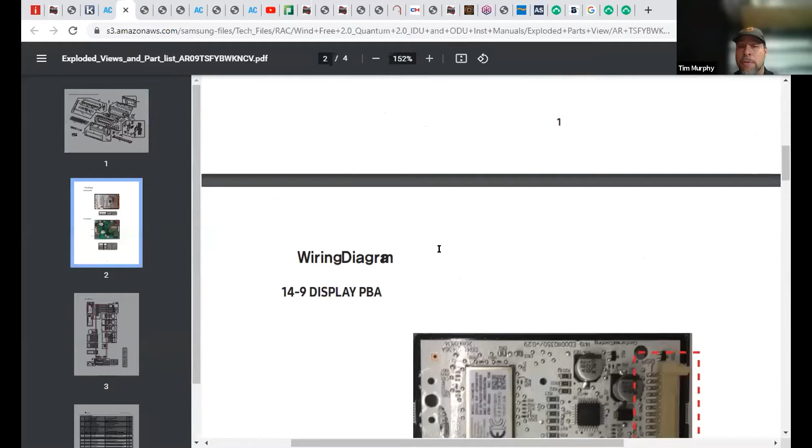But for right now, oh wait, I just want to show you this too. If you scroll down, you have exploded parts views. What's good about this, you can go ahead and get the part numbers before you call the distributor to help speed up the process, and it has a good breakdown of everything. So close that. And now we're going to go to the installation manual.

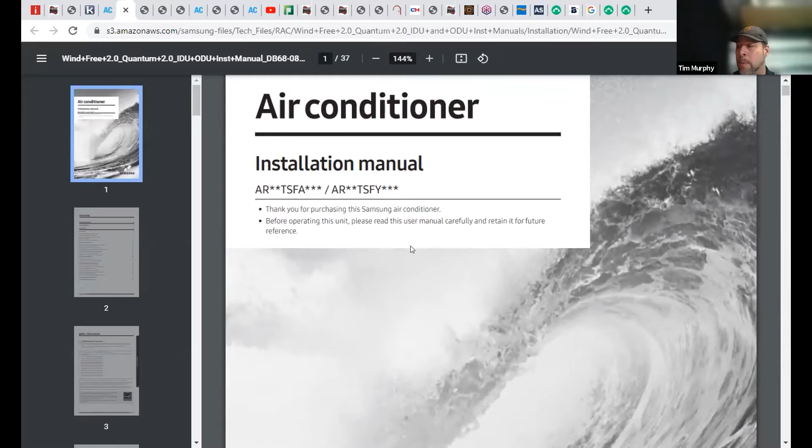90% of the questions that I get asked over the phone could be answered through this website. All this is available also on the app. It's just slightly different trying to navigate, obviously, because it's an app. I do use this website on my phone because it does tend to make it a little easier for me. And then we're going to go to content.

So today what we're focusing on, as I mentioned, we're talking about leaks, specifically in mini splits. And some of the most common issues that I've come across, not just on the technical support side now that I've been working with Tropic Supply, but also myself, having crews in the field and diagnosing and doing installs. There's nothing worse than having to go back to a job site because of a Freon leak that could have easily been avoided if proper steps were taken.

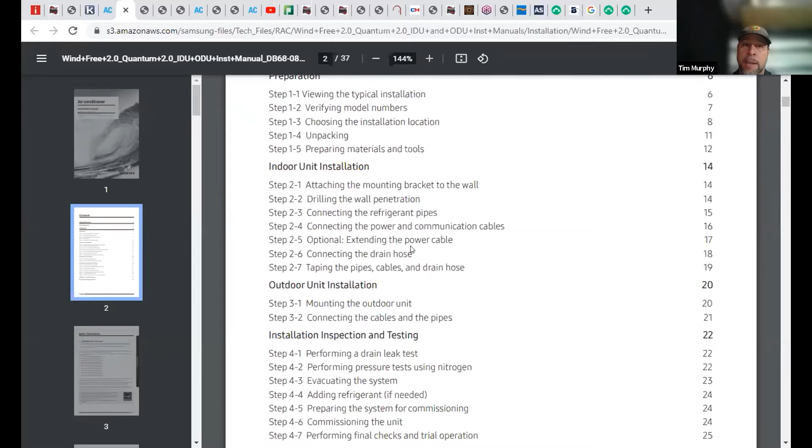So today we are going to be looking at, let's see here, connecting refrigerant pipes. I'm going to move this. Okay, connecting refrigerant pipes is page 15.

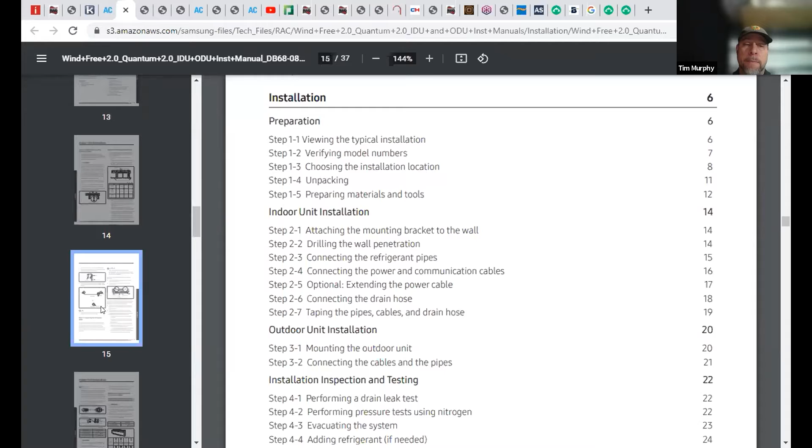Okay, so most of the basic stuff that everybody should know, right? Not crossing over the pipes. And what I want to show you is here are your torque specs. It's going to give you a good range. Your 1/4 inch, 10 to 13 foot-pounds of torque, 3/8, 25 to 30, 1/2 inch, and 5/8, all there for you. So if you're not sure, if you are using torque wrenches, this is a very important resource for you.

Honestly, I didn't use torque wrenches for the majority of my time installing mini splits. So I'm not saying not to use them, but most people don't have them. After using them, I can say that is very important, especially if you got some technicians that don't have much experience making a good flare connection. This torque wrench is going to give you a peace of mind.

You set it, it clicks, and you forget about it. It's going to be sealed. As long as they did a proper flare, you don't have to worry about being over tightened or under tightened. It's very useful. Actually, Todd Sutherland was the first person to really stress to me how important it is. And once I started using it, I didn't stop. So I highly recommend investing in a torque wrench.

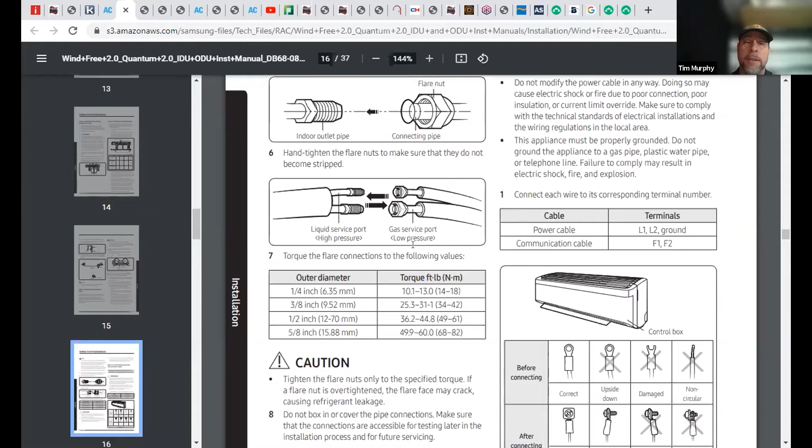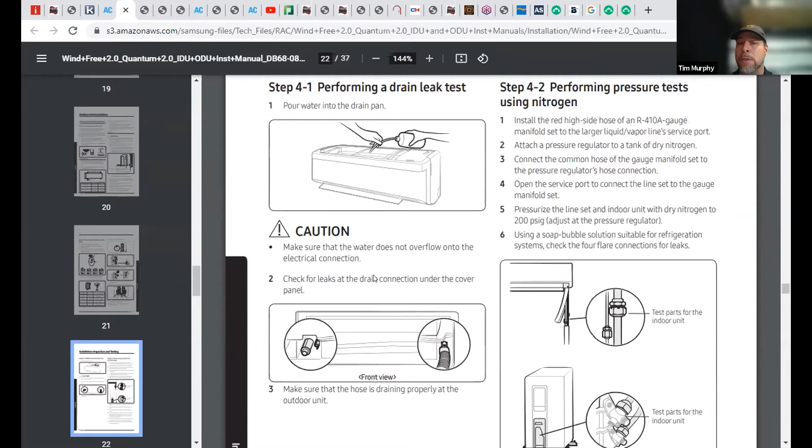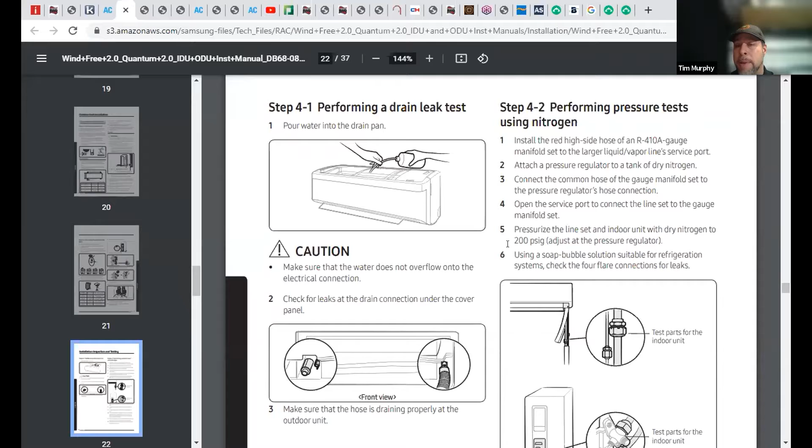Okay, next page we're going to go to is going to be page 22. And this is where we're going to talk about our leak testing. Now, if you joined us for the vacuum Todd Talk earlier this week, you'll already know that your vacuum comes after your high pressure leak test. So Samsung recommends almost like a triple pressure test. They recommend you testing at 200 PSI, check it for soap bubbles, waiting 10 minutes, then going 400 and going to 600.

And in all reality, I was a contractor and I did several installs myself, and we're in a hurry a lot of times trying to get the job done. It's getting late. I recommend at minimum testing 600 PSI. If you don't have the time to do the 200, 400, and 600, just slowly ramp it up to 600 PSI. Hopefully your guys aren't alone on the job. They can have one guy looking for leaks or listening for leaks and then spraying down the joints with bubbles.

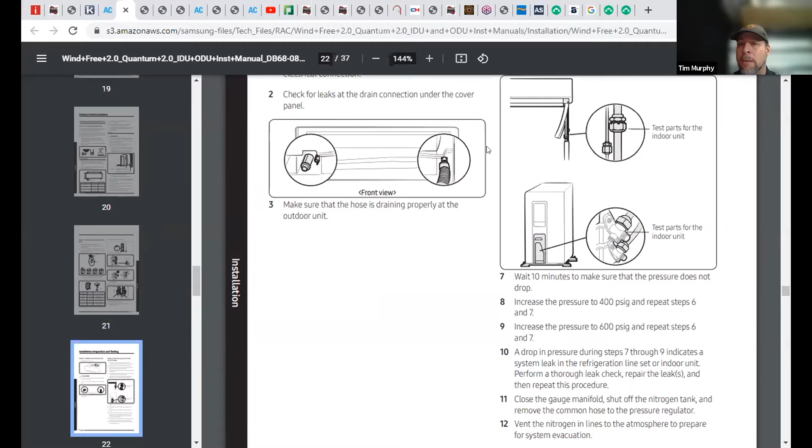I recommend soaking the flare joints with bubbles before you start the pressure test. So that way, as it's starting to fill the system, you may not hear it, but the bubbles are a great visual indicator of a leak. And we're going to see that a little later today. So as I mentioned, your final pressure test should be at 600 PSI, and take your time and listen and use the bubbles to see if there's a leak. If there's no leak, you're good. Just go ahead and put that vacuum on and follow the best practice procedures as Todd Sutherland showed us earlier this week.

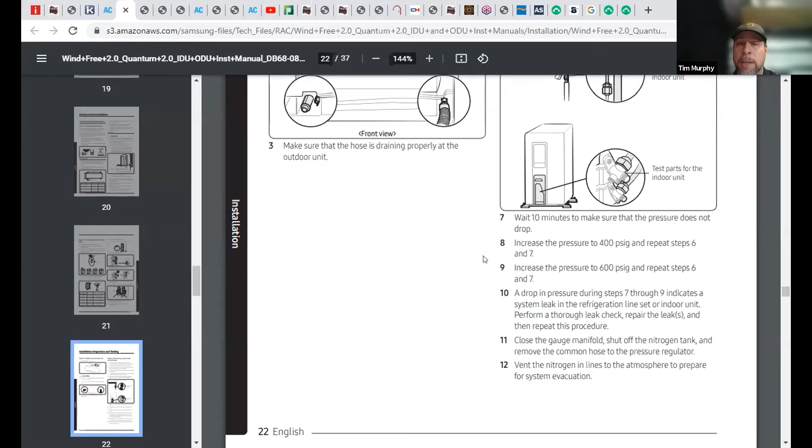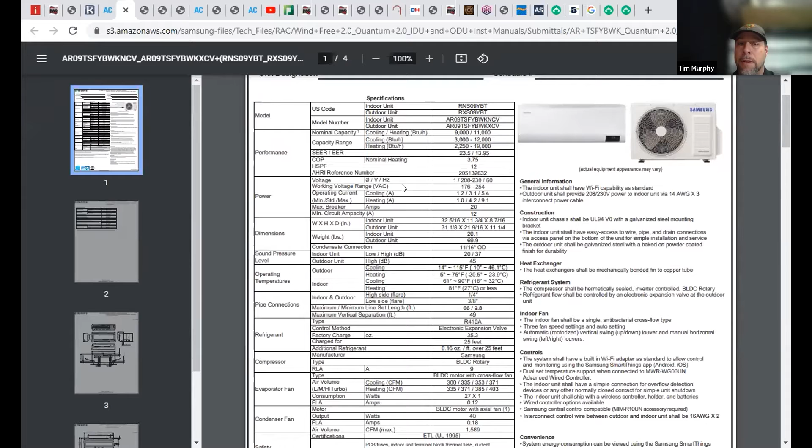So next, I want to go to a very valuable source of information: your submittals. Now you'll see it has a submittal for just about every combination that they're going to offer, but we're going to go ahead and use this one, the 09. So this is your submittal. It's going to show you your matchup. It's going to give you its BTU heating and cooling range. It's going to show you power source, your dimensions, operating temperatures, pipe connections. It's going to show your maximum vertical separation. All this stuff is very useful, especially prior to installation.

We're going to look under refrigerant here. Now, obviously, it shows you the type. And now it shows you your factory charge, which on the 09 is 35.3 ounces. And it's charged for 25 feet. Additional refrigerant, this is very important to pay attention to, because I've been finding a lot of installers grossly overcharging their systems because they're not focusing on that decimal point. They are just seeing 16 ounces, 1 ounce per foot. They're just really not paying attention.

And I've seen guys adding an additional ounce per foot of piping. Obviously, that's grossly overcharged, and you're going to have compressor startup issues. It's not going to work properly. If it does even start, it's just not going to work right. And with these systems, what's critical to understand is that you're not charging to your gauge pressure. Ideally, you want to charge by weighing in the system. I call it a critical charge. If you've worked in refrigeration, then you already understand the concept. But the proper charge in these systems is crucial to a proper working system.

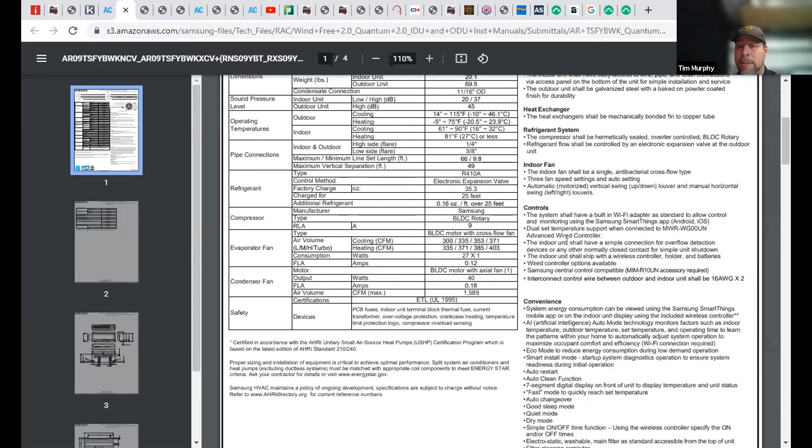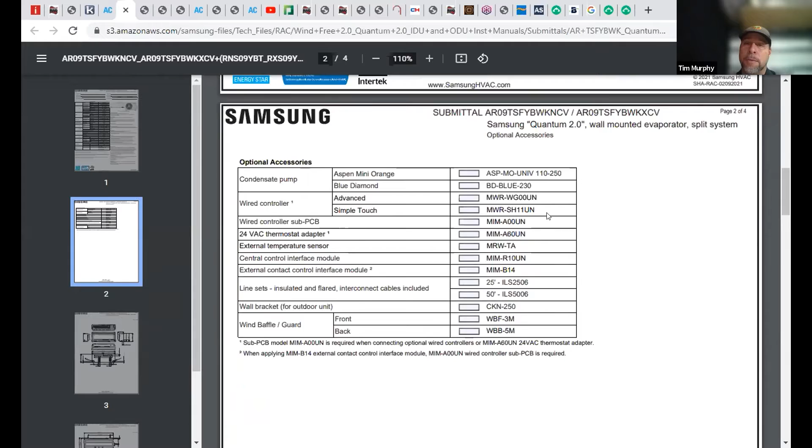Very important to pay attention to that. Another great thing about these submittals is it shows you all your accessories. It gives you the part numbers. So if you're looking for a wired controller, you have your options. Your thermostat adapter, you have all your options here, and it's going to make it easier for you to be able to order these parts and have all those numbers available when you call the local branch.

All right, so with that being said, I'm going to go ahead and switch cameras, and we're going to do some hands-on because you don't want to see me navigating this website all day.

Oh, that's a close-up view of my face. You don't want to see that. There we go. Okay. Can everybody hear me? Nicole, can you hear me? Yes, but you need to stop sharing your other screen. Oh, man. Okay. Is that better? Perfect. Okay. All righty.

One thing, I'm not a fan of PowerPoints. I'm more a fan of the hands-on. So hopefully you guys are as well. Okay, so let's get started here. What I want to start with is what not to use. It's very important that we're not adding anything into the system. These are items we don't use.

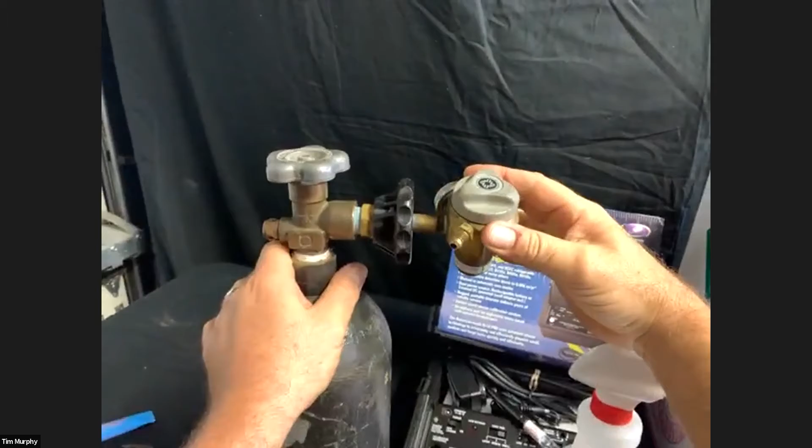You don't have to try to set it. It has a low flow nitrogen setting, and if you don't have this regulator, you can do it with a regular regulator. But if you've never low flowed nitrogen before, there's plenty of videos on YouTube. You need to start low flowing nitrogen every time you braze, especially with all the new equipment that's coming out lately. The tolerances are smaller. You have your micro channel coils. Everything is not as forgiving as it used to be.

So get used to low flowing nitrogen, or teach your guys, or even check up on them if they're doing the install and they're starting to braze. Go out to the job site and check on them. Make sure they're low flowing nitrogen. And like I said, you can hear that it's barely anything. First, you want to purge the system of any air, and then begin your low flow.

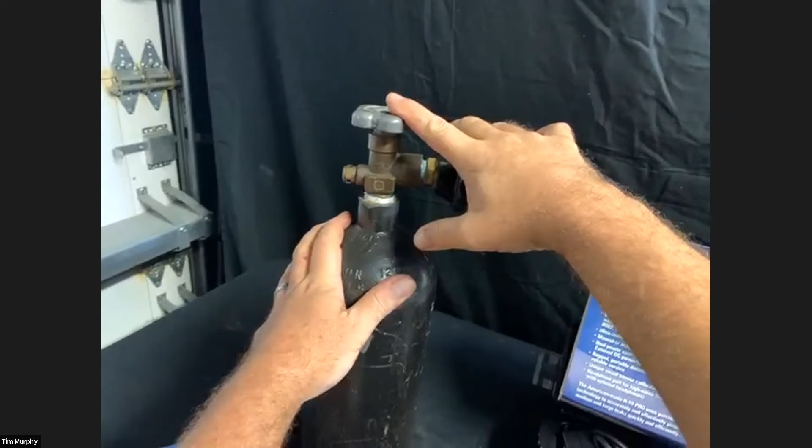But just something I want to mention that is vital: if you do have to solder or braze a joint with mini splits, you have to do this. You really do. Can you get away with not doing it? I'm sure you may get lucky, but just low flow nitrogen. Just make your life simple and headache free.

This is what we're going to be using when I do all my leak tests. I always use Big Blu first. Anytime you go to a job and you have a leak, you don't need to bust out your leak detector first. Take your time, go through the system, look for oil. If there's no Freon in the system, add some extra pressure to try to listen or look for a leak first. A visual inspection is oftentimes all that's really needed, especially on your bigger leaks.

With mini splits, you're going to be looking at your flare connections. And I always suggest that with the mini split, prior to startup, you take the cover off the evaporator as well, to listen to the coil and try to see if there's a leak, or inspect the coil to see if there's a leak in the coil as well.

But this Big Blu works great. What I've noticed that I like about this over a lot of the other ones is that you get these little micro bubbles. They're little tiny suds that will build up. And with the other leak detectors, they're the liquid leak bubbles. I don't notice as good a result finding those really small leaks as I do with this Big Blu. So this is a very useful thing to have in your truck.

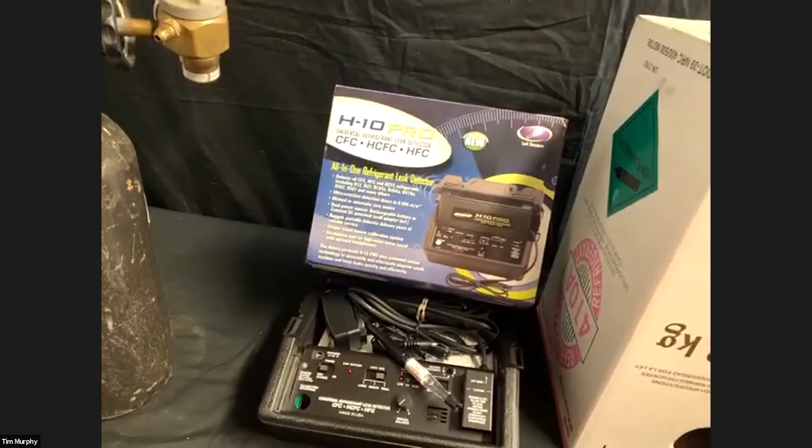Maintaining your tools is going to be one of the most vital things that you can teach your guys or do yourself. And understanding how leak detectors work. If you're using a heated diode, or an infrared, whatever leak detector, it's important to read the manual. And what's interesting is if you look at this right here, it says always read user manual, and has an exclamation point. And of course you want to register it as well. But with these, a lot of times, these are things that a lot of us get kind of complacent about, or we just take for granted that people know these things.

And I'm just finding that sometimes I'm having to state some of the things that I think are obvious, but they're not always obvious, because either they learned in a rush, they were installing, or they never went to school and were trained. I never went to a technical school. I was trained in the field, so I learned by my mistakes, and I made a lot of them.

But one of the important things about a leak detector is maintaining it. You have a little filter here, and I recommend changing that filter, checking it regularly. You don't have to change it every time, but it's important that you make sure it's clean. That way you can maintain and you can find those leaks, especially those small leaks.

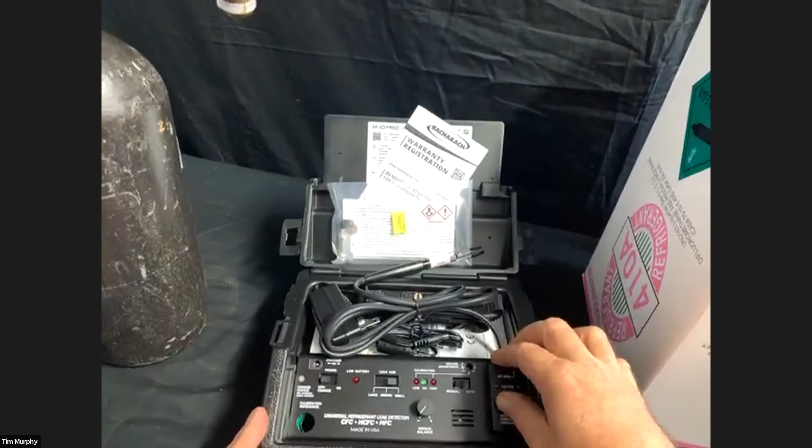What's great about this unit here is that it has a vial where you can calibrate the system in the field. So if you're not sure if it's working properly, it always has something that you can calibrate right there in the field. And this one, unlike the old one that I used to have a long time ago, has a battery and it's rechargeable, so you don't necessarily need to be plugged in. So very, very good tool.

Now I'm going to work my way... Actually, you know what? Before I work my way into some of the things that I recommend using to help you guys prevent leaks, last time I did my mini split talk, I wanted to show you guys exactly what the EEV valve looks like on the inside. So this is an EEV, electronic expansion valve, and basically how it works is it opens and closes by unscrewing. It opens the valve, and this is what it looks like, just like a little needle valve. It just slides in here.

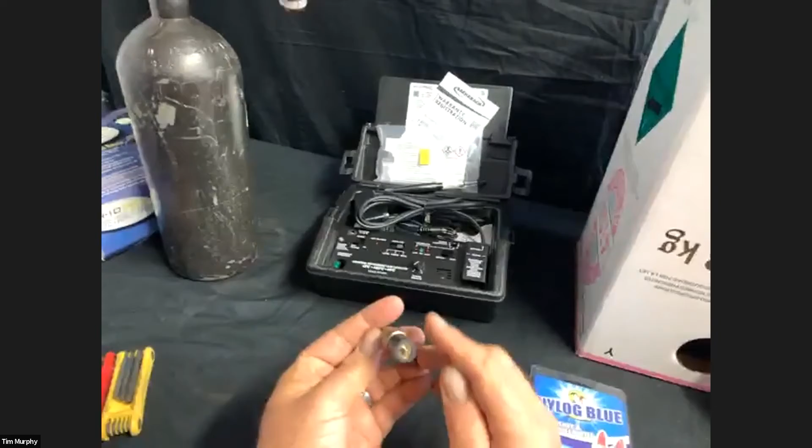So that being said, if you're looking down at this, clockwise will tighten, counterclockwise will open. If you get a little magnet, I usually recommend going to an auto parts store. If you take the top off the system, there's usually a bulb over this, as you see, I cut it off. If you're not sure the EEV is stuck, and this applies to almost every EEV that I know of, you can take that magnet and work your way around that bulb, and it should open the valve if you're going counterclockwise, and close it if you're going clockwise.

So it's just a helpful tool to help diagnose if you're having a system that just seems to be pumping down, or some type of restriction here. You can obviously check the stator, but you may want to see if it's locked up. And the best way to see if it's locked up in the field is just take a magnet, go around. You should be able to open it. But if you're using these kinds of sealants or any kind of additive, that can definitely gum up and clog these EEVs. So that would be something you may want to just try to avoid altogether.

Now, Nylog blue. I know some people say not to use it, just use a little POE oil or something on the flares. I've had good results. I've never had a problem using Nylog blue. I usually, and I'll show you a little later, put it on the flare on the inside. I'll put it on the surface of my flaring tool as well to help lubricate and make sure we get a good flare. And then we have our flare seals. When in doubt, these work great.

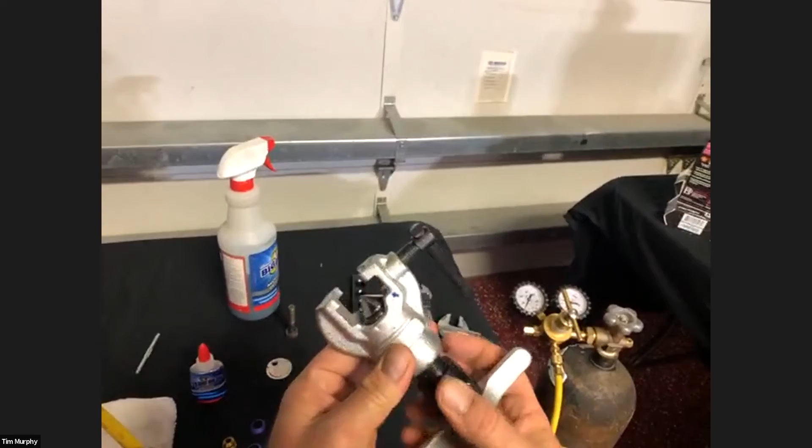Now, I'm going to work my way over here. I'm going to show you the flare tool that I like to use. There are other flare tools out there. If you're not familiar with these, this is one by JB, but there are several versions of this. Yellow Jacket offers this version as well. It comes with a flaring block right here. I recommend getting one of these. And actually, I learned this from Rami Musa from Samsung. He did a video the other day.

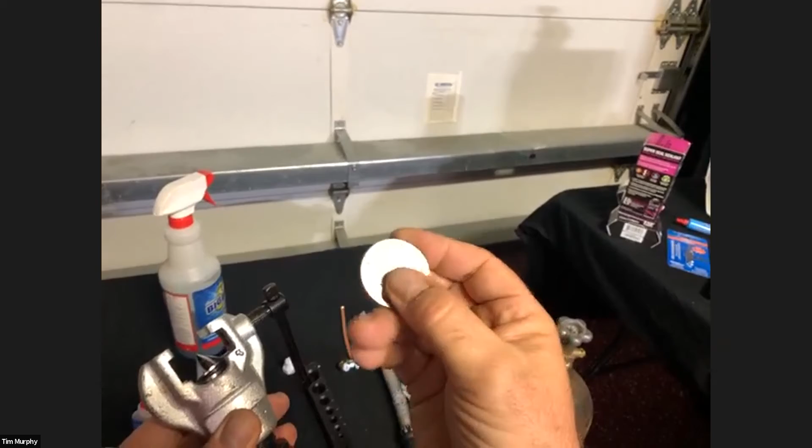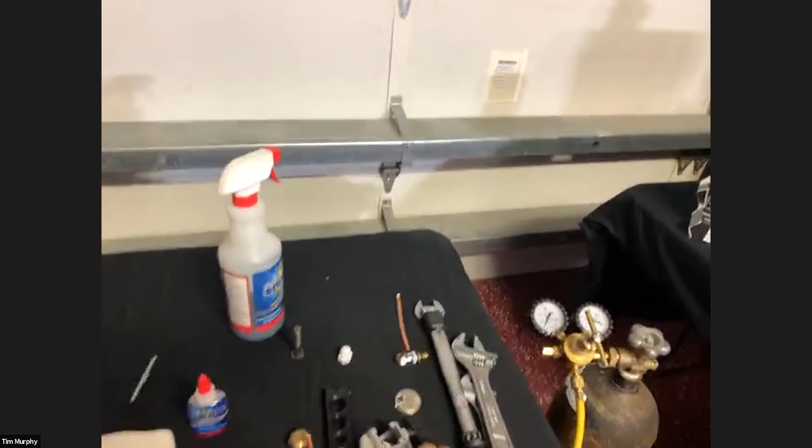And I never thought about using one of these, but this is a spark plug gapper, and it has all your measurements on there. So depending on the size copper, what I would recommend doing is just writing on the back of here how much the copper needs to extend, because when you do these flares, you want the copper to extend slightly past, so you can get a nice flare seal. It's just a helpful tool that you can keep with your flare toolkit to help you make sure you make the correct flare.

Now with this flare tool, I usually recommend just 1 drop. When using a Nylog or anything, just 1 little drop is all. You don't want to overdo it. But what's great about this flare tool is if you look, let me see if I can do it so you can see it well, it has that kind of elliptical rotation there. So it's going to make a nice smooth flare as it works its way, and it'll click stop when it's done, so you don't have to worry about overdoing your flares.

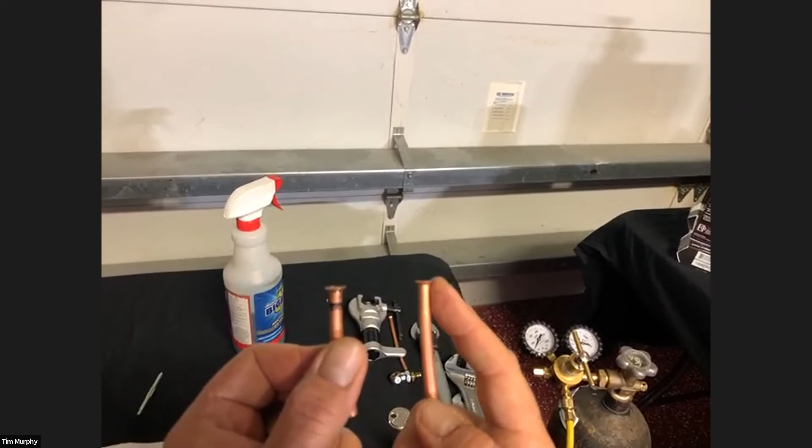But what's important is the depth of the flare. I got 2 flares here. I don't know if you could tell by looking at it, but on this one you don't have as much gasket surface or seal surface as you do on this one. And that typically is caused by not tightening the flare block enough. So as you start to make the flare, the copper starts to slide into the flare block, or just not measuring it correctly.

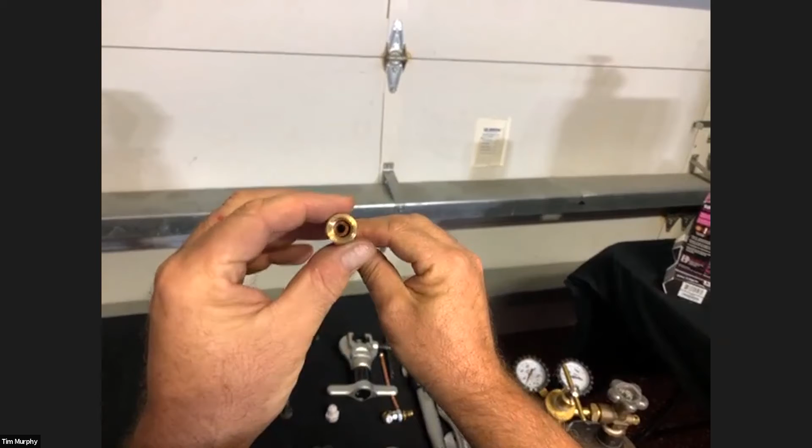So just so you can see the difference here, I have a flare nut. And if you look, I don't know how clear that is, but there's a lot of space there, right? A lot of space. Now, with the other one, this is how your flare should look. If you see that flare, it takes almost the whole space in there. So you're gonna have a really good wide seal to help prevent any leaks in the future.

So highly recommend. As simple as making a flare is, there's a ton of videos out there. I recommend watching them, but nothing is going to replace hands-on. You can watch videos until you're brain dead, and it's not going to do you any good if you don't get out there and do it yourself.

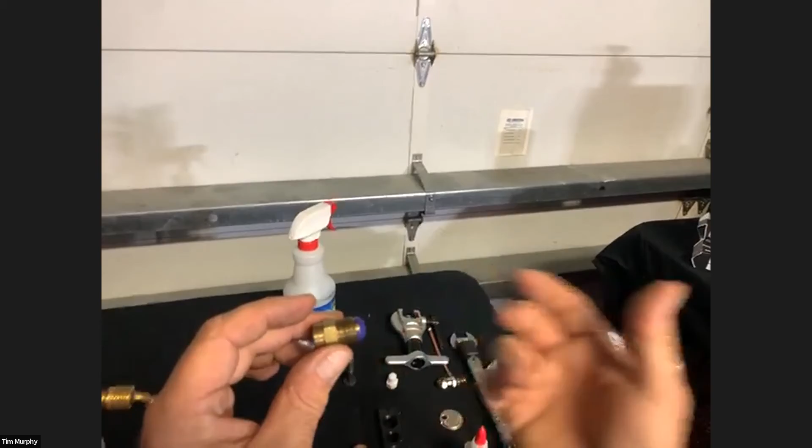Now these are the flare gaskets that I mentioned earlier. They come in different sizes, and you're just going to put it on. It's going to click on, and it's going to sit on that surface. And with these flare gaskets, you don't use Nylog. Don't even use that. Just make sure the surface is nice, clean, dry, and then put your flare on and use the same torque specifications I mentioned earlier that you can find on the website, and then you'll be good to go. I have had great results with those. I never really had an issue where they still leaked.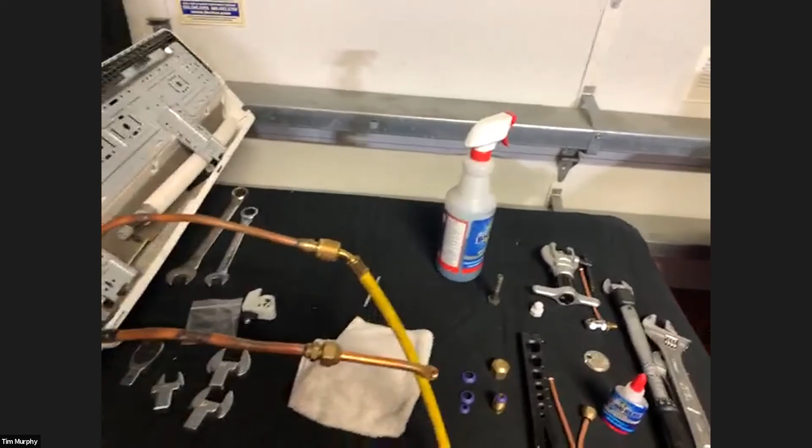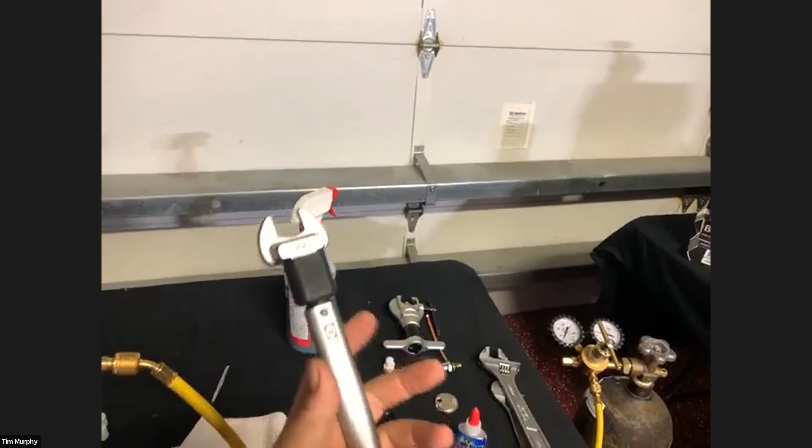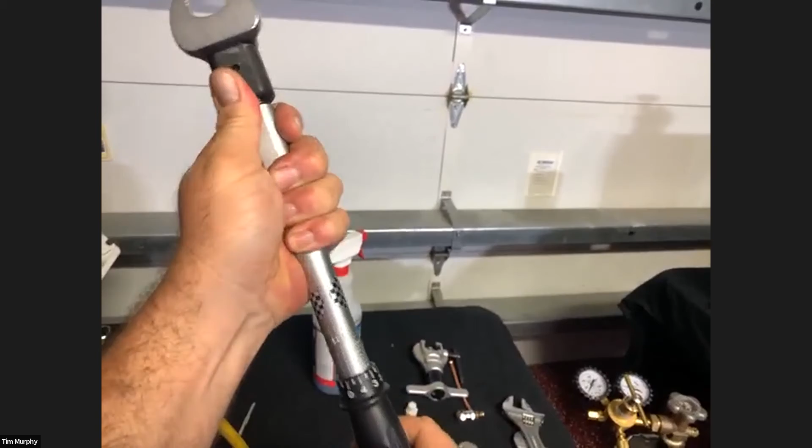Another thing, talking about torque, I want to mention this. This is the torque wrench. I just really can't stress how much easier this is going to make your life. If you've never used a torque wrench, there are two different types of measurements: you have Newton meters, and then you have foot pounds. Basically all you do is unlock it and turn it to whatever setting it has. It's all your different settings, and in between settings you have your numbers here. So if you're at 10, that would be 11, 12, and so on.

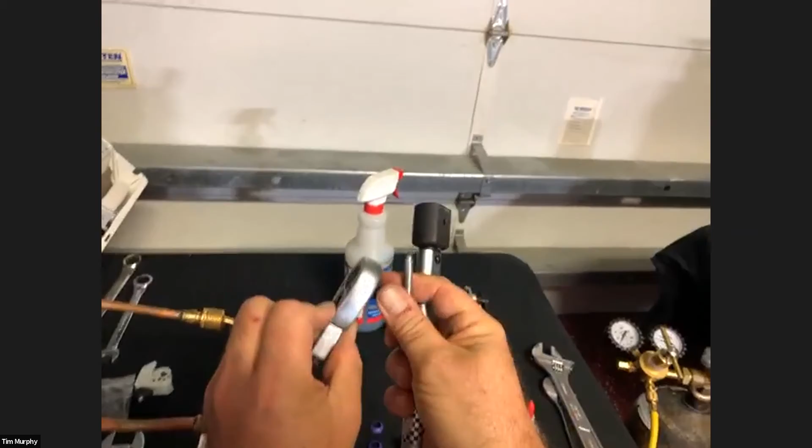These ends are replaceable, they're interchangeable just by using a little tool it comes with, and that comes out, and then you can just replace it. This torque wrench also comes with a ratchet end, so if you need to torque bolts down on a compressor, you're able to do that as well.

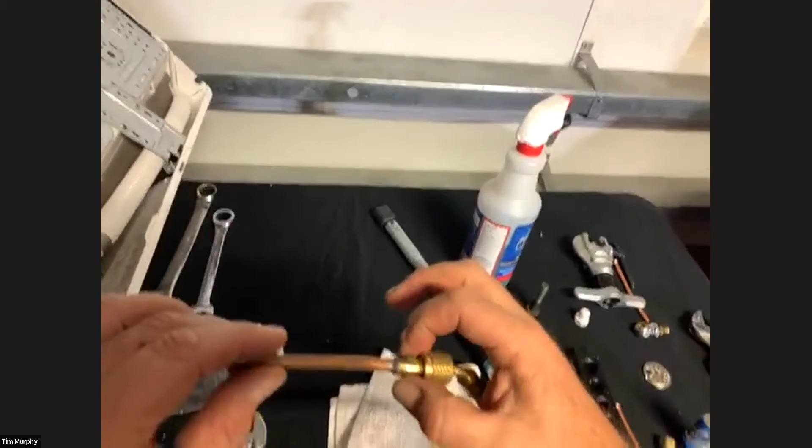And actually, one of the last things I want to show you: this was a system that we got back from somebody, and you could definitely tell that they used some kind of channel lock or vice grip to hold this when they were doing their flares, because it's all scarred up. Unlike this side, fortunately they left it alone. I'm going to put a little pressure into this, and we're going to go ahead and get some bubbles.

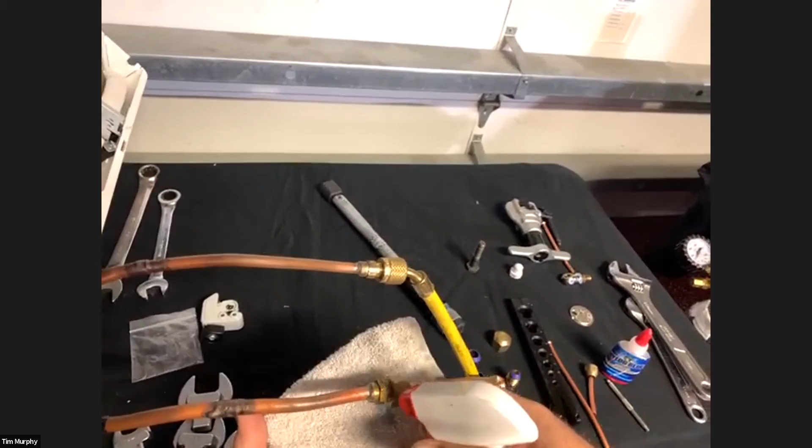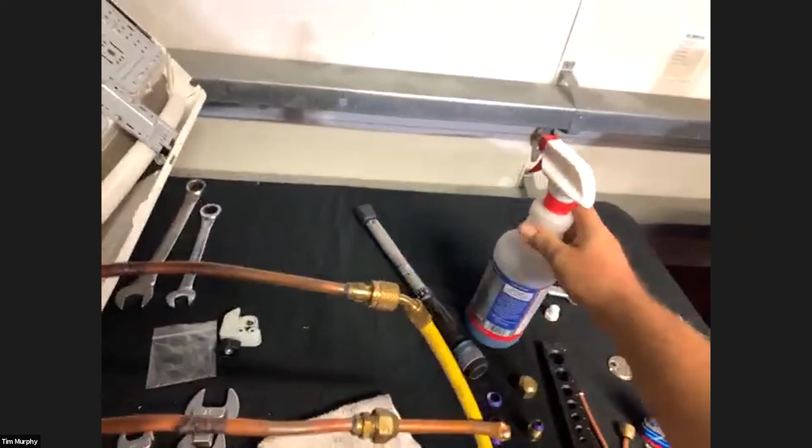Another thing I want to mention is that I got pressure in here right now. You don't hear anything. So the ear test is useful, but it's not the most accurate. That's why we always recommend using some bubbles. You can see that it's bubbling right there, and it'll just keep building bubbles. So do your pressure tests and go ahead and check them with some type of solution.

It doesn't have to be Big Blue, but I definitely recommend Big Blue, because over time, if it's a smaller leak, it will build micro bubbles, and you will see little tiny suds on the copper. So it's definitely very useful. It works really well. Some of the other leak detector solutions I've used, like Palmolive in water, don't work that well, and you really don't get that consistent viscosity that the Big Blue will provide.

But that is just about all I have. As I mentioned, this was a little quicker. Most of these tools can be purchased at Tropic, but more than anything, I just want to hammer through how important it is to start upgrading your tools, getting these low loss fittings, and avoiding some common mistakes that we all make.

I still make mistakes. We're going to make mistakes, but if we can help minimize those mistakes, it's going to make your life a lot easier, and it's going to make everybody happy. You're not going to be upset at the equipment, and nobody's going to be upset at you guys, because we're all doing the right thing, and time is money at the end of the day.

So I don't have anything else. I'm going to switch the camera back over, if that's okay. Sure. You want to get into the trivia questions? I think that would be great. Okay, can everybody see my screen? Yep. Okay, so everybody make sure you get your chat boxes open so we can get started with our quiz questions.